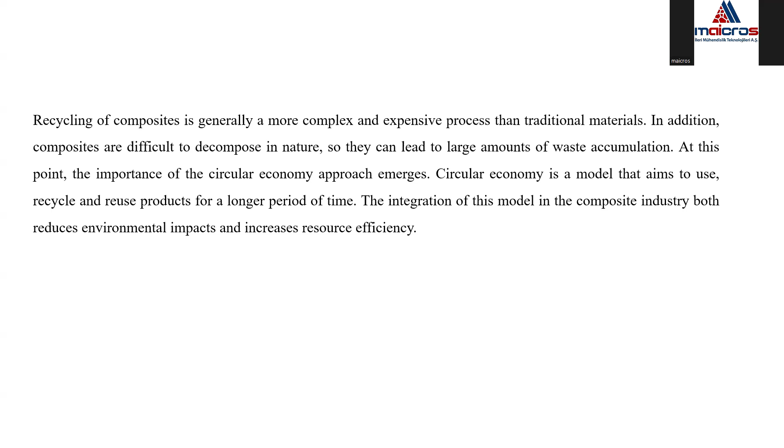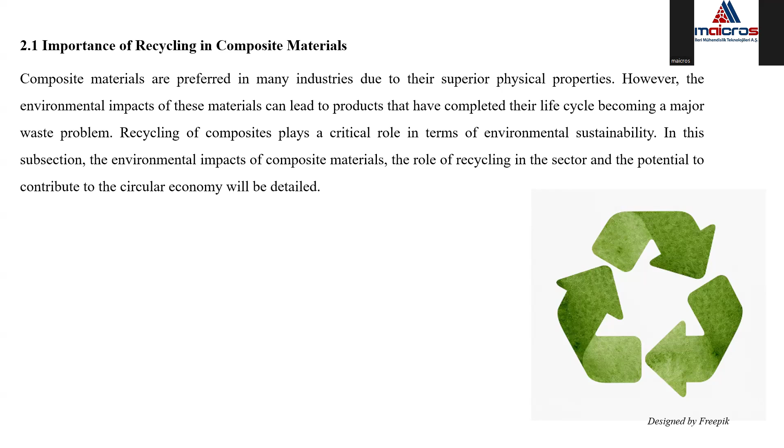Additionally, the challenges that might be faced in achieving sustainability goals in the composite industry and the opportunities also in the area will be discussed. So let's start with the importance of recycling in the composite industry. So composite materials are preferred in many industries due to their exceptional properties. But on the other hand, the environmental impacts of these materials can cause many problems in the environment. So recycling of composites becomes very critical, very important in terms of the environmental sustainability. So that's an important part, the recycling of the composite materials.

So when we look at the environmental impacts of the composites, we can subdivide this section into three phases, such as production phase, use stage, and the stage after the end, which is end of use stage. So in the production part, the production of composite materials is generally an energy intensive process. The production of high performance materials such as carbon fiber requires significant energy consumption. In addition, the environmental impacts of the chemicals used in the production of composites cannot be ignored. This high energy consumption in the production phase will increase the overall environmental footprint of composites.

In the use stage, composites generally have minimal impact on the environment during their lifespan due to their long-lasting and durable materials. However, when these materials reach their end of life, recycling challenges cause environmental problems. As a last stage, which is called end of use stage, composites that have reached their end of life will be very difficult to decompose or reuse in nature. So that will create serious waste problems, especially in large size composite components such as automotive and wind turbine blades. Moreover, these wastes usually accumulate in landfills and will create an environmental burden.

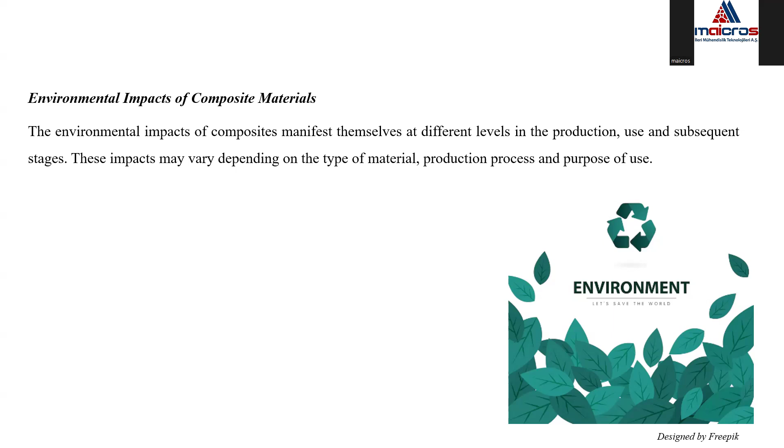So in order to minimize the environmental impacts of composite materials, it's of great importance to develop recycling processes and adopt more sustainable production methods. So the role of recycling in the sector. So in this part, we can say that the recycling of composite materials is important in reducing environmental impacts. So we can also say that protection of natural resources will be achieved by recycling of the raw materials. This prevents the depletion of natural resources at the same time. Although the recycling of composites is more limited compared to traditional materials, the recycled fibers and resins used in the process can be transformed into new materials. Recycling generally requires less energy than raw material production.

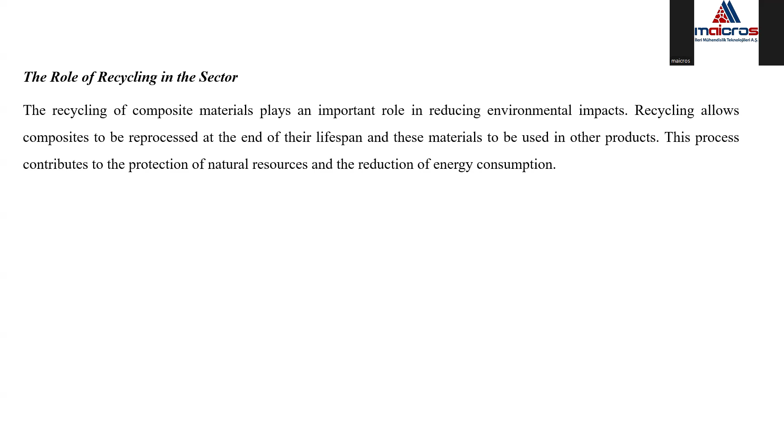The other parameter that we can discuss is the waste management. Recycling of composite enables the processing and disposal of large amounts of waste, especially large composite waste generated in the aviation, automotive, and wind energy sectors, which are recycled and then reduce the need for landfills. At the same time, there is a potential to contribute to circular economy in the composite industry. So recycling of composite contributes to the basic principles of the circular economy model.

A circular economy is a production model that aims to reprocess, recycle, and reuse materials after they have been used once. So this model is based on the principle of reduce, reuse, and recycle, and is the key to increasing the sustainability in the composite industry. The potential to contribute to circular economy in the composite industry can have many pillars such as resource efficiency, reduction of waste, reducing carbon footprint, new business models and stuff.

So let's start with the resource efficiency. Circular economy enables more efficient use of raw materials. Recycling of composites allows limited natural resources to be used for a longer period of time and reduces the need for new raw materials. At the same time, recycling of composites reduces the amount of waste and minimizes the waste in the production phase. So that not only provides the environmental benefits, but also creates more economically efficient production processes.

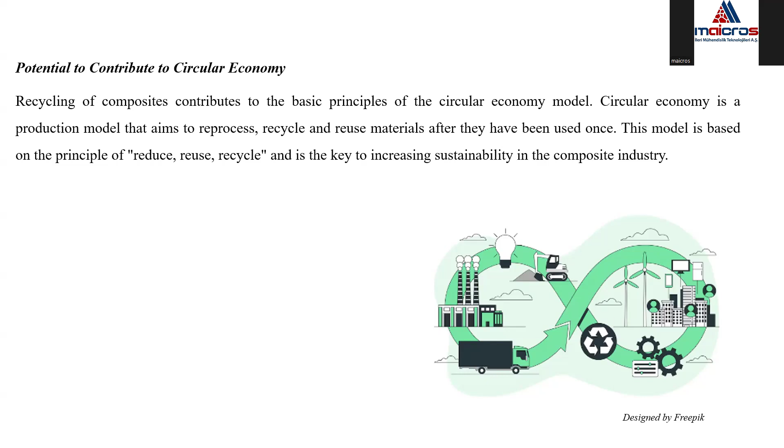So the integration of the circular economy model into the composites industry will provide more sustainable production methods and more efficient use of natural resources. And at the same time, this model will offer a great opportunity to reduce the environmental footprint of the sector and achieve the sustainable development goals.

When we look at the recycling methods, we will see three main methods that are used in recycling. Those are mechanical recycling, thermal recycling, and chemical recycling. Mechanical recycling allows the recovery of composite materials through physical reprocessing. So this method is usually a less energy consuming and simpler process. Composite materials are made usable again through physical processes such as grinding, cutting, and crushing.

So after these processes, the parts will be separated mechanically. In the separation method, separation is made between the matrix and the fiber of the composites. For example, a glass fiber reinforced plastic composite can be separated by physical means rather than chemical or thermal processes. So in this way, the fibers can be reused while the matrix material can be further processed for recycling.

When we look at the advantages of mechanical recycling, we can say that it has low cost, simple application, and fast processing. But low quality of the recycled materials and the limited area of use can be mentioned as the disadvantages of mechanical recycling.

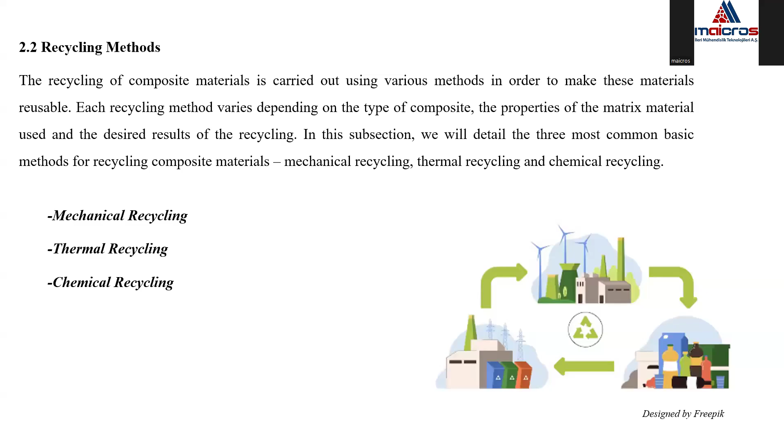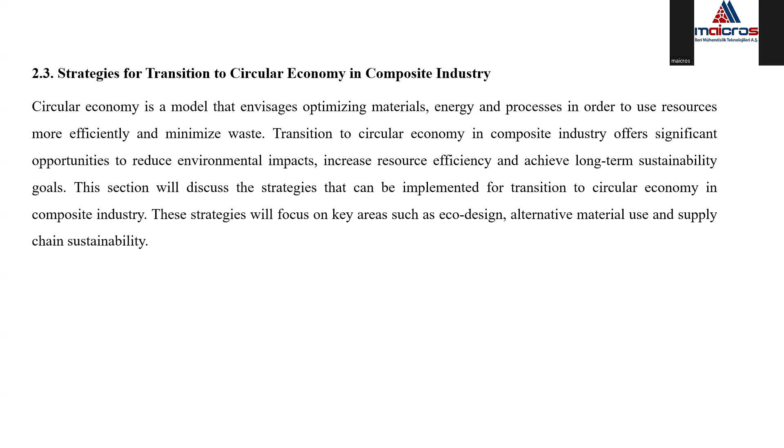In this part, we can also discuss the strategies for transition to circular economy in the industry. Transition to circular economy in the composite industry offers significant opportunities to reduce the environmental impacts, and also, as mentioned before, is expected to increase resource efficiency and achieve the long-term sustainability goals.

One of the methods that can transform the composite industry to a circular economy approach is the eco-design approach and sustainable product design. The eco-design method aims to minimize the negative impacts of production on the environment in the design phase. So in the composite industry, eco-design considers sustainability goals at every stage from material selection to production processes. This approach aims to reduce the negative environmental impacts of products by evaluating every stage from production to post production.

So the basic principles of eco-design start from material selection. The environmental impacts of the materials to be used in the production of composites should be taken into account. For example, using biodegradable and recyclable fibers. Also, selecting matrix materials could be mentioned in this stage, and also long life design.

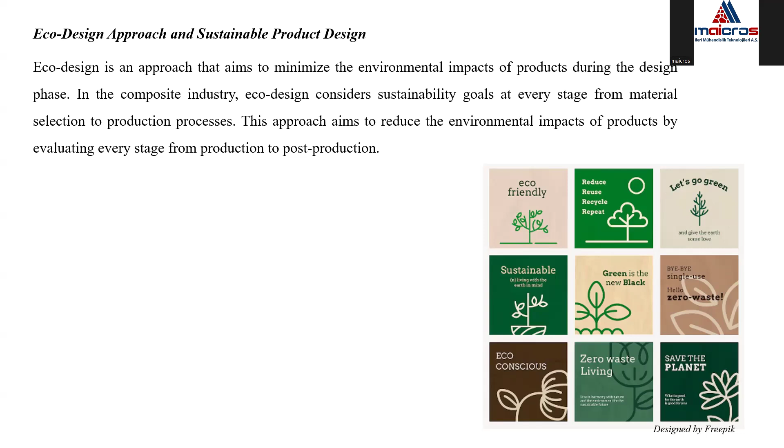The main aim is to design a sustainable product. So the main advantages of sustainable product design could be reducing energy and resources used in the production processes, and also products that have a longer lifespan and less waste, and also products that will be easy to recycle after the eco-design method.

The other method that can be used in the transition could be using alternative materials and recycled raw materials. So, in integrating composite materials into circular economy, the use of alternative materials and recycled raw materials could be very important. These materials could offer a potential to reduce negative environmental impacts.

So, biodegradable fibers or bioplastics or some advanced high performance resins could be crucial at this stage. On the other part, in the production phase, recycled raw materials could be used. So when we say recycled raw materials, we mean the recycled fibers or recycled resins.

So fibers used in the production of composites can be reused if they are properly recycled. Also, recycled resins could be used in the new composite products if that's possible. So these are the main methods that can decrease the negative impacts of the composite in the industry.

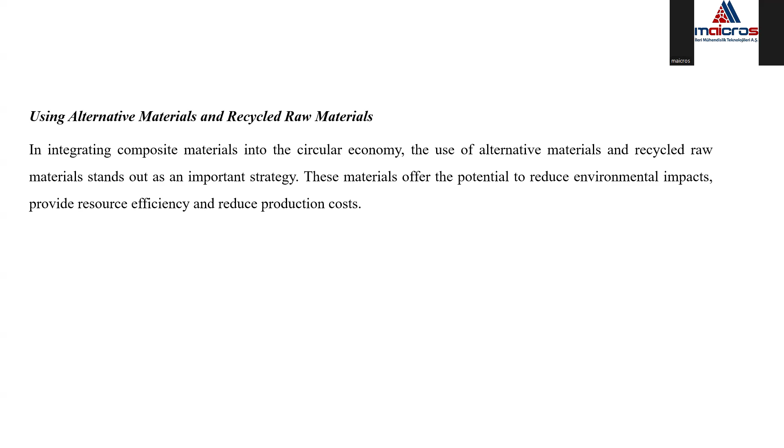So in the transition to circular economy, there are many challenges and opportunities. For example, supplier selection and collaborations. So companies in the composite industry should select the suppliers that comply with sustainability goals in their supply chain. So these suppliers should use environmentally friendly materials and have sustainable production processes. That's one of the steps.

The other step is logistics and transportation. So in order to reduce the carbon footprint in material transportation processes, more efficient transportation methods and logistics networks should be used. In addition, localizing material transportation processes will also reduce the negative environmental impacts.

Waste reduction and reuse. It's important to minimize the waste generated during production and make this waste reusable if possible. So reprocessing waste or using it in other products contributes to the circular economy model. The other parameter regarding the waste is the waste collection and separation.

Composite waste should be processed with collection and separation methods to make it suitable for recycling. That's an important step before recycling. That ensures effective management of waste, and that's also important in the large size composite components.

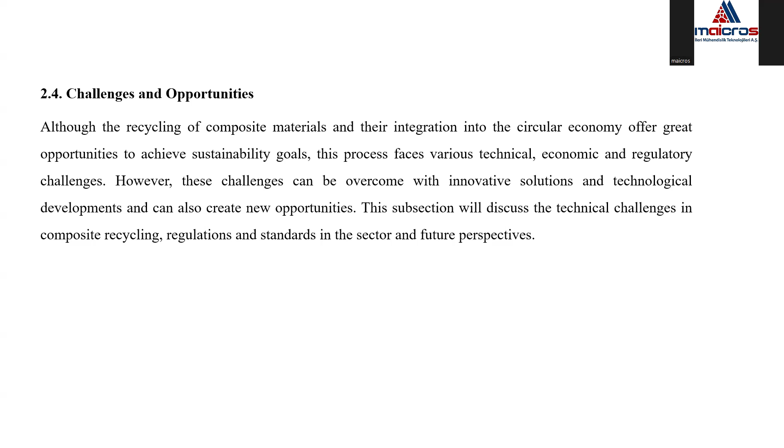For example, separation of matrix material is a technical challenge. High quality fiber recovery is another technical challenge because when recycling carbon and glass fibers, factors such as the length, surface properties, and the durability of the fibers can be affected. This can lead to low quality fibers that are recovered, and their reuse is only possible in low performance products. So maintaining fiber quality is one of the biggest technical challenges that can be mentioned in this part.

Mixed composite components is also a technical challenge. Composite materials are often composed of multiple layers and different types of materials. For example, composites containing metal reinforcements or polymer binders can complicate the recycling processes. So that limits the recycling efficiency, for example. So these are the main technical challenges.

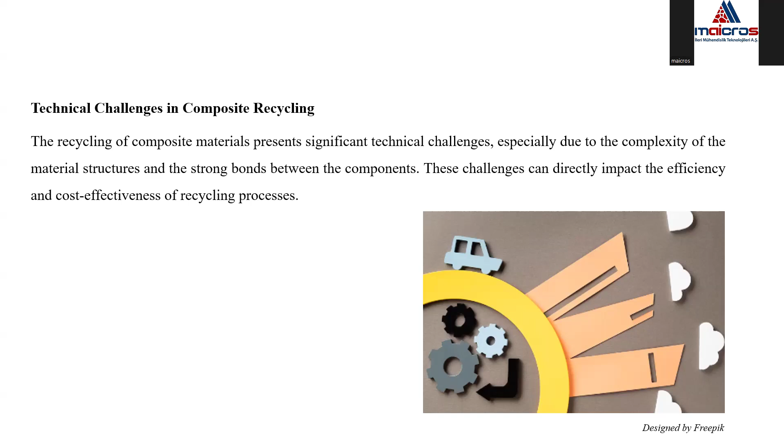So what could be the solutions to this? So development of new chemical and thermal recycling technologies, for example, and design of new processes that will allow more efficient recovery of fibers could be the solution. So, as a summary, the development in the recycling technology is the main solution for the mentioned technical challenges.

In addition to technical challenges, regulation and standards are also important factors. So in many countries, laws and regulations aimed at reducing environmental impacts are becoming significant. So initiatives such as the European Union Green Deal include regulations aimed at reducing carbon emissions and encouraging recycling. So the lack of global standards for composite material recycling processes can lead to different methods used by different companies in the industry.

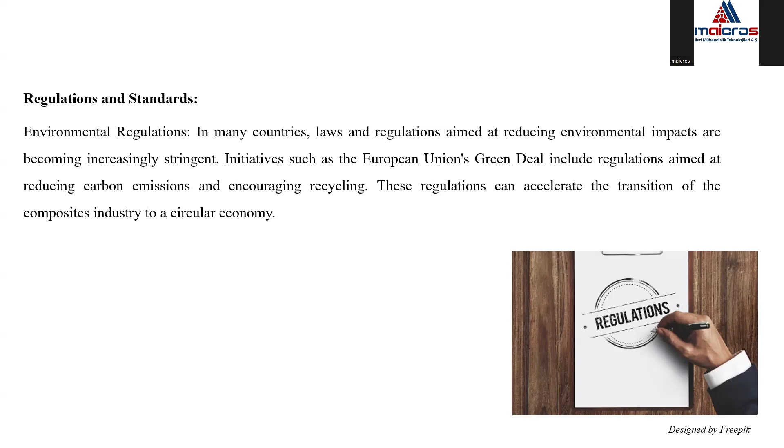So, for example, currently, since the recycling of composite materials is not very common in the industry, there are not enough regulations and standards. That's why different companies could use different methods to recycle the materials. But this can negatively affect the recycling efficiency and process effectiveness. In addition, specific standards need to be established for the use of recycled materials in products. So I guess these are some challenges that can be solved with the developed technology and the regulations in the industry.